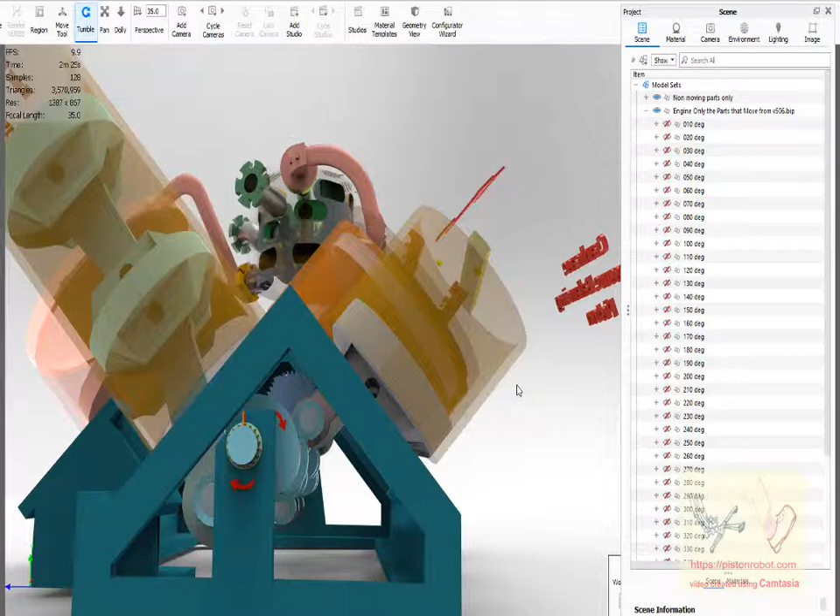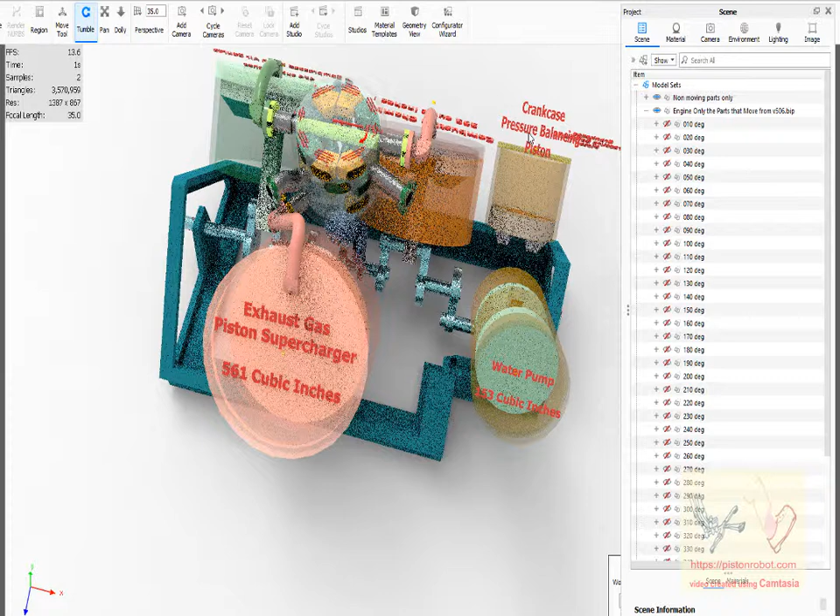This, you kind of can view this engine from this side. And so I kind of wanted these letters to be letters that you can read from this side. But you can also view this engine from this side. And so I thought maybe those crankcase pressure balancing piston letters should be readable from over here too.

And so what happens is you have the crankcase pressure balancing words here, and you have the same set of words here. They're just facing in different directions so that it's readable from either side. There's only one crankcase pressure balancing piston. There's not two of them.

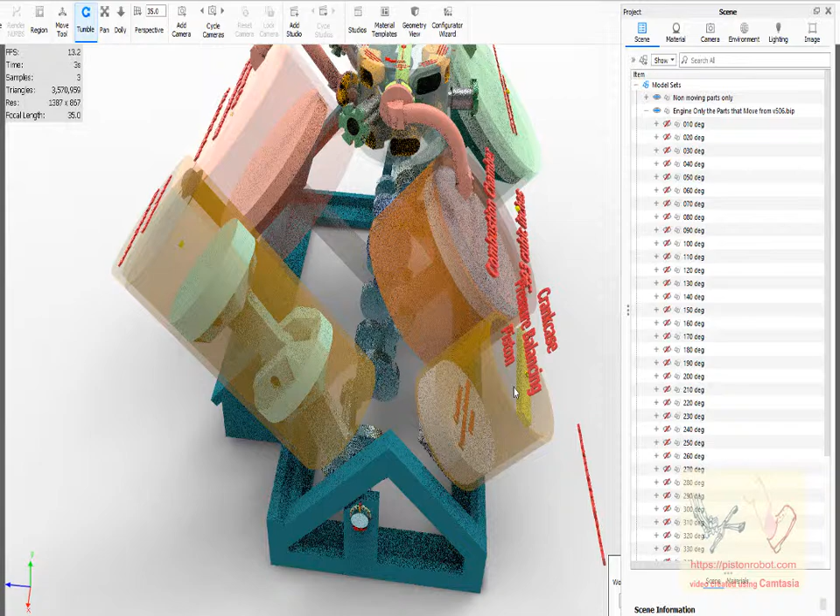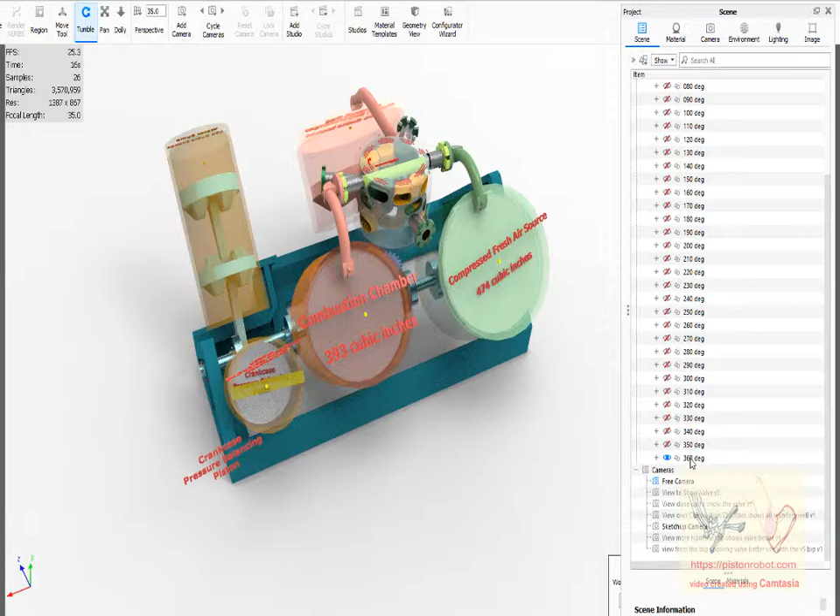Okay, and over here we can see that we have divided the rotation of the crankshaft up into 10-degree increments. So there's 36 of them, 36 views. And we currently have the crankshaft at position of 360 degrees, and it's all very arbitrary.

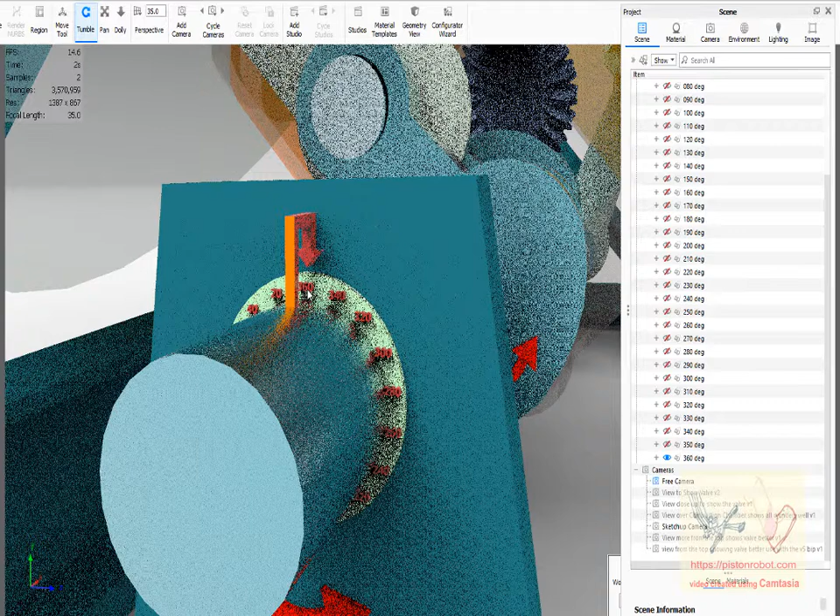360 degrees is the place where the little arrow that I connected to the crankshaft is pointing towards the number 360. There's no magic here. It's just because it gets extremely confusing. Remembering that this whole entire structure is running all the time and around in circles, and it's easy to get yourself mixed up.

We should talk a little bit about what is the point of this engine. Why was it even thought of or constructed? And we wanted to make an engine that doesn't make any noise, because it makes no sense to try to create a robot that sounds like a chainsaw. It's not going to be acceptable.

And that's easily done with electric robots and batteries and electric motors, but meaningful amounts of power that you can carry around with you. Remember, the robot needs to be autonomous, so it needs to be totally disconnected from anything. So it needs to have enough energy to do whatever it's doing walking along without having to go recharge its batteries.

And my intuition at present with current battery technology and engine technology is a robot that has enough excess power to be able to be helpful is not going to work with battery power. This is just my opinion. This is why this engine was created. It's a silent engine. The thing that needs to be remembered is engines are basically air pumps. The more air you put through them, the more fuel you put into them, the more power they make.

And in general, the expensive part of an engine are the parts. So a small engine running faster makes more power from the same amount of metal parts. So it's less expensive to generate power with engines by running them faster. The principle of science that is involved in running the engine faster is you've got to get the air into the engine, but you've also got to get the exhaust gases out of the engine. And the movement of the exhaust gases generates noise.